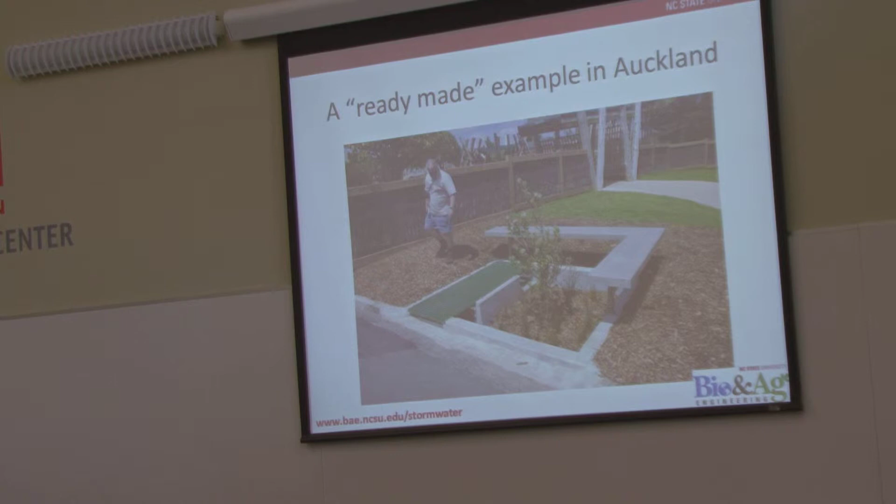Another ready-made example from Auckland, New Zealand. So you can see kind of an inlet here with a little bit of a pre-treatment area to get the trash and sediment out. And then your filtration side there in the bottom of that picture.

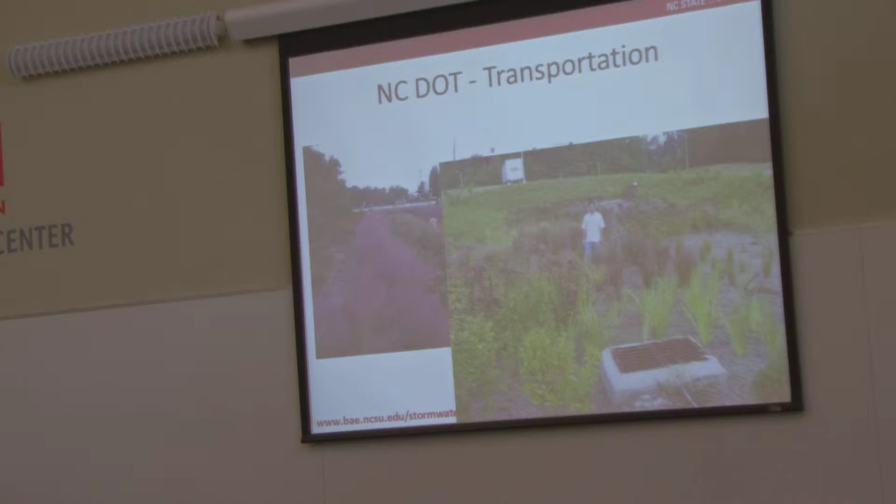NCDOT, our DOT does a really good job with stormwater management. They've got, I think, over 150 bioretention cells installed at this point. So you can see a couple here. They look pretty good, very, very large systems. Typically, our DOT has very large systems that they've installed.

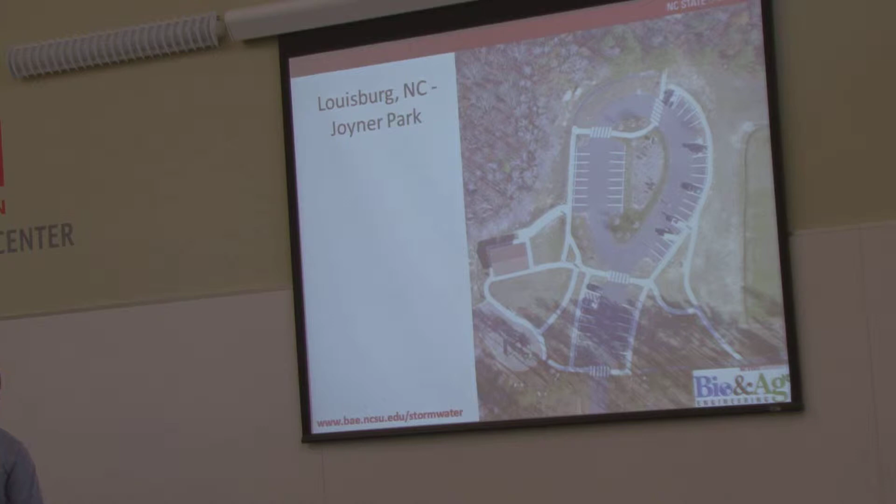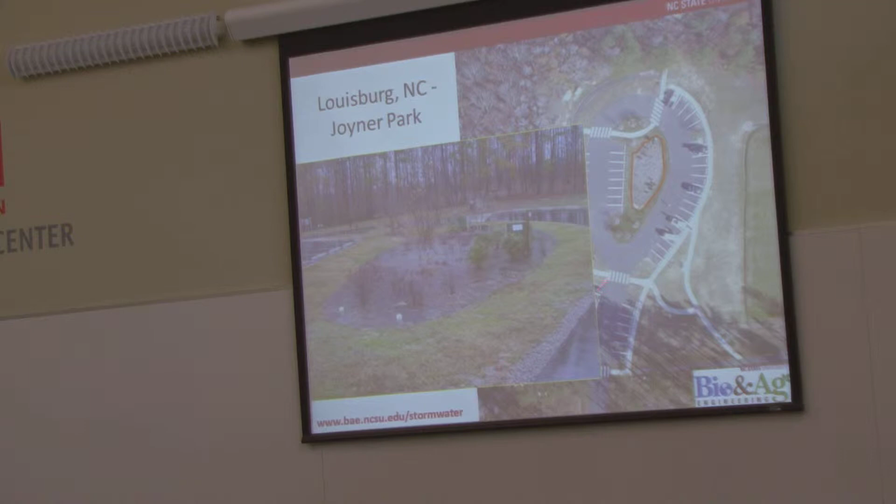Louisburg, North Carolina, this is a research project. I'll show you all some data on this later. This is essentially in a turnaround in a park. You can see the bioretention cell there at full ponding. You can see in this case we're using a filter strip, a grass filter strip with a gravel verge as our pre-treatment for this particular system.

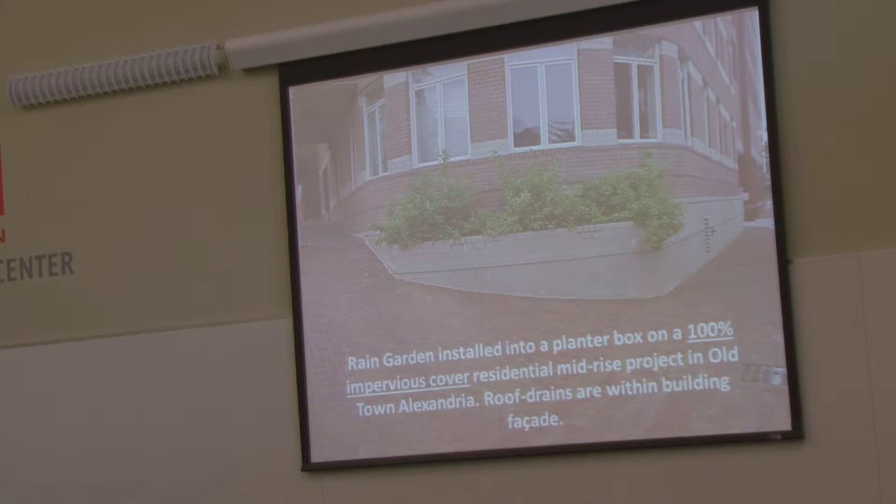That's just taking one downspout. So it's this one downspout right here that's being treated. Another example of ultra-urban application, this is in downtown Alexandria, Virginia, where they've got internal downspouts that are being routed to this bioretention planter here. 100% impervious cover in this particular watershed. And then high dollar landscapes, this is Seattle.

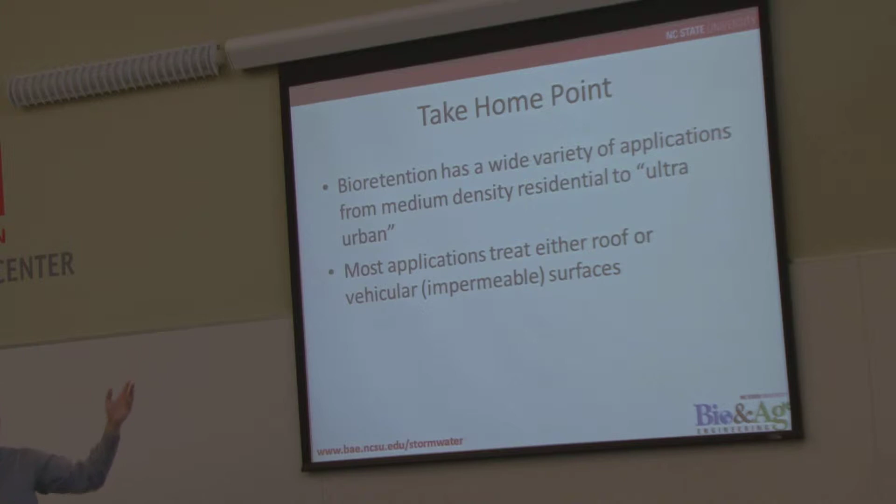So some examples of what you can do and where you can use bioretention cells. You can use them in many different areas: residential, commercial, ultra urban. I hope I've convinced you of that. Most applications are either going to treat roof or parking lots. That's pretty much what you're limited to.

So how do these systems work? Typical schematic here: water comes in from your parking lot or rooftop. That water then fills up the bowl, which may be 9 or 12 inches, or maybe a little bit deeper. You have vegetation on the surface, and water moving through a permeable fill media, which is often sandy.

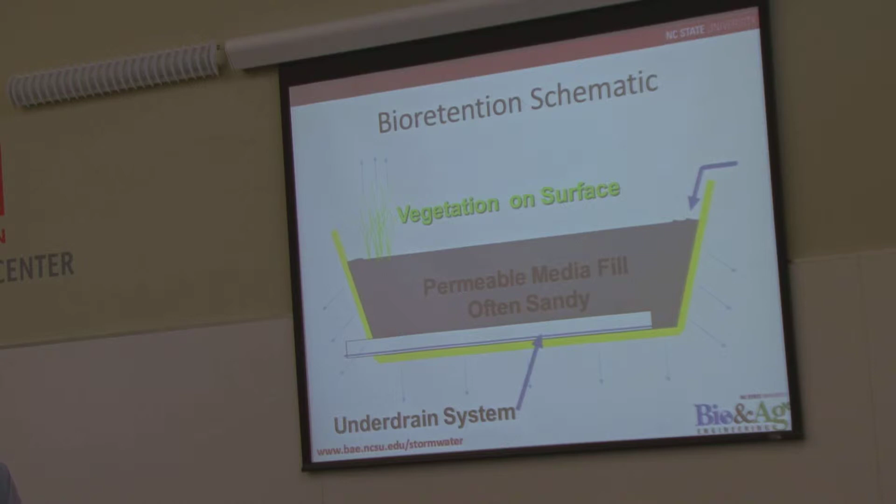And then the water moves down and either out through the sides or the bottom, which we call exfiltration, or drainage out through an underdrain, which is typically installed, as Corey said, unless you have very high infiltration rates in your underlying soils, basically coastal plain type applications.

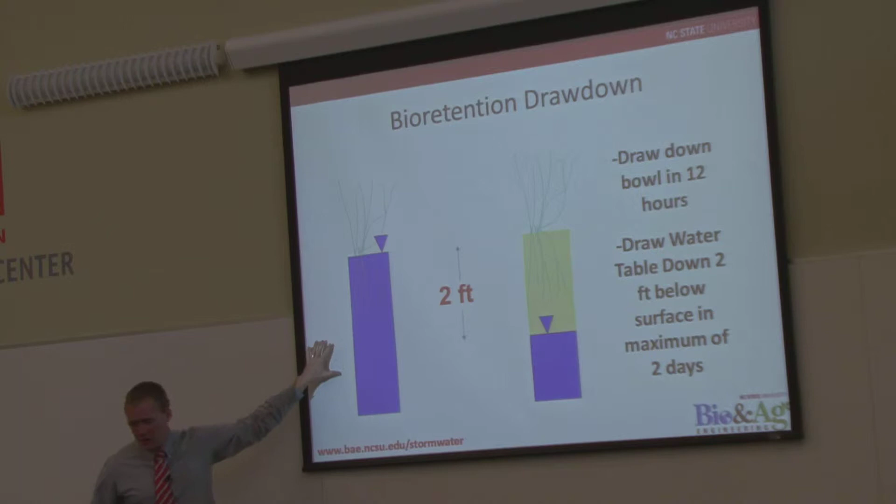Drawdown of bioretention cells: you do need your bioretention cell to draw down, otherwise it will turn into a wetland. If you have extended periods of water, your plants will die off and it won't function as a bioretention cell. Right after the storm event, the water will have filled all of the media as well as the bowl. What we recommend in North Carolina is having an infiltration rate such that the bowl draws down in a 12-hour period, so you should see no water on the surface 12 hours after the end of rainfall.

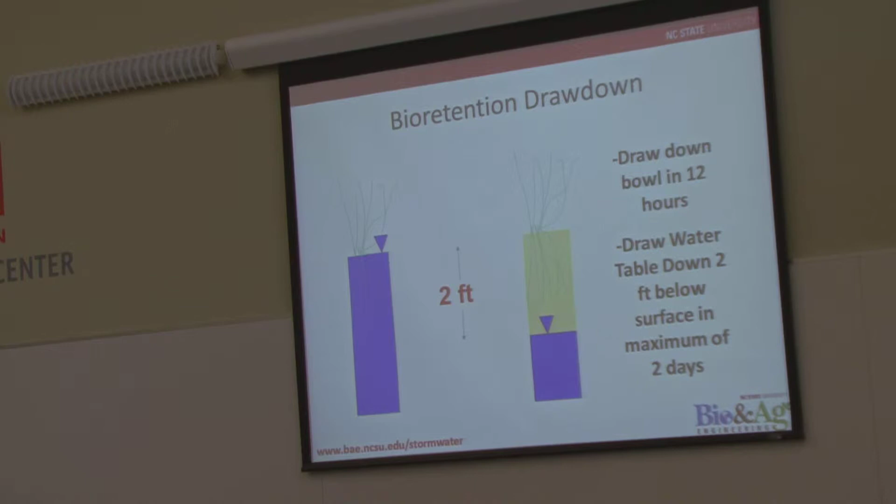And then we want the water table to draw down an additional 2 feet below the bottom of the bowl, so basically 2 feet of media would be drained after 48 hours. That's our requirement in North Carolina. I think that dovetails pretty well with y'all's here, pretty close to what you guys have to meet as well.

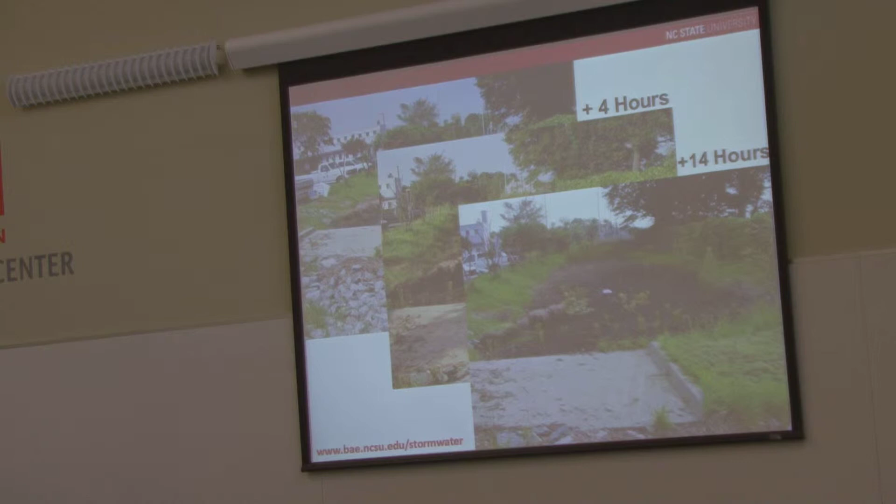Here's an example, back to the Hal Marshall building in Charlotte. Right after the storm event, you can see the bowl is filled up. 4 hours later, we're starting to get some drainage. And then 14 hours later, you can see the mulch is moist, but there's no surface ponding. That's what you want to see: the surface bowl completely drained within 12 hours. That's going to give you the best long-term performance.

Design objectives for bioretention for water quality and water quantity. You can completely control the 1-year storm depending on what you do, and maybe the 2-year storm depending on how you design these systems - I'll talk more about that later. You can obviously partially control the larger storms, but you're not going to get anywhere near complete control of the 10, 25, or 100 year storm.

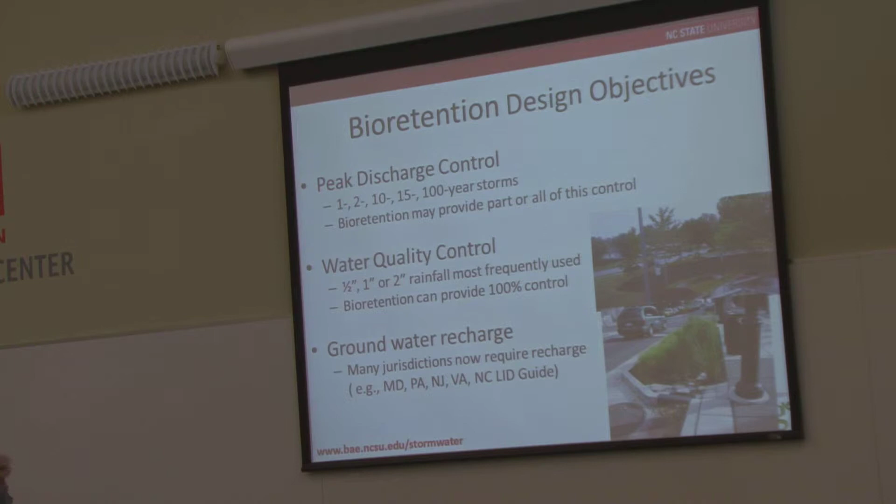Water quality control, we're typically designing in North Carolina for the 1-inch storm in the Piedmont and the mountains. We do have a slightly larger 1.5-inch storm event used for design in the coastal plain, simply because they get more rainfall - roughly 20% more rainfall in Wilmington, our coastal city, than we do in Raleigh. Then there's also various jurisdictions that require groundwater recharge, and these systems will provide you benefits in groundwater recharge, as I'll show you.

Seasonally high water table - is that a problem with bioretention? Yes, it is. We don't want to trade a surface water issue for a groundwater issue. Groundwater is arguably harder to treat than water that you have at the surface. So areas where seasonally high water tables are near the surface, namely coastal areas, floodplains, wetland areas - those are areas you want to avoid.

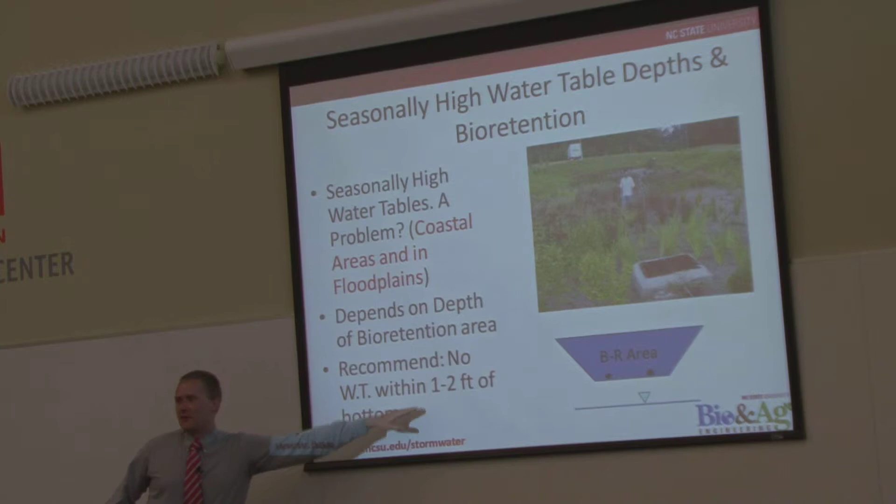What we recommend is no water table within 2 feet. This says 1 to 2 feet, but I know that engineers cheat, so 2 feet of the bottom of your cut. And I think it's 2 feet here as well.

So the reason for that, or what that means, is if you have a 1 foot ponding depth, a 1 foot bowl, and if you have 3 feet of media, and let's say roughly a foot of aggregate in your drainage layer, your water table now has to be 6 or 7 feet below grade. So you really do have to have some depth to your water table to make these systems work, unless you have a shallower media depth than the typical 3 feet.

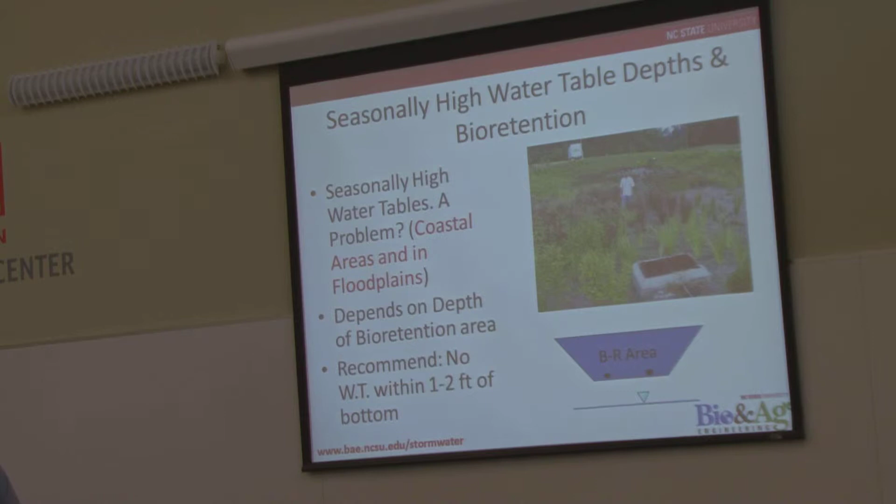The reason for this is just to have some native soil underneath the bioretention area to filter out any additional pollutants that have made it through your media and to the bottom of the cell.

Pollutant removal mechanisms. The reason why bioretention works so well is it's got the most pollutant removal mechanisms out of any green infrastructure BMP that's out there.

Sedimentation: the water's coming in with velocity, so it's picked up particles and trash. You're putting it in a basin, so the velocity is pretty much near zero. Your trash is going to drop out, and a lot of the suspended sediment is going to drop out. Because a lot of phosphorus is attached to sediment, you're going to get at a lot of the phosphorus in the water as well.

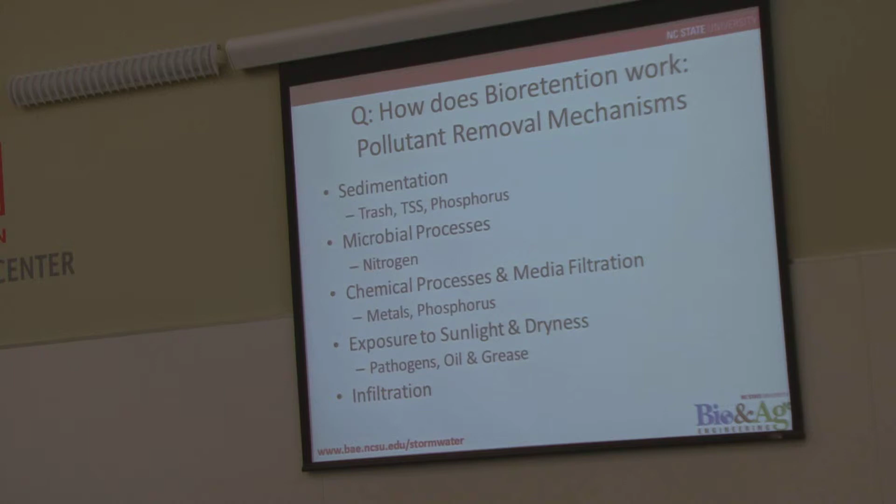Microbial processes, denitrification, which we can force with the internal water storage zone that Corey mentioned earlier, and I'm going to talk about ad nauseum. We can get a lot of denitrification and take our nitrogen to N2 gas, which is 78% of our atmosphere. We're breathing it constantly.

Harmless. Chemical processes and filtration are going to get at our metals and phosphorus. Basically, they're going to adsorb to either organic matter, which is chemically binding to organic matter, or to clay and silt particles.

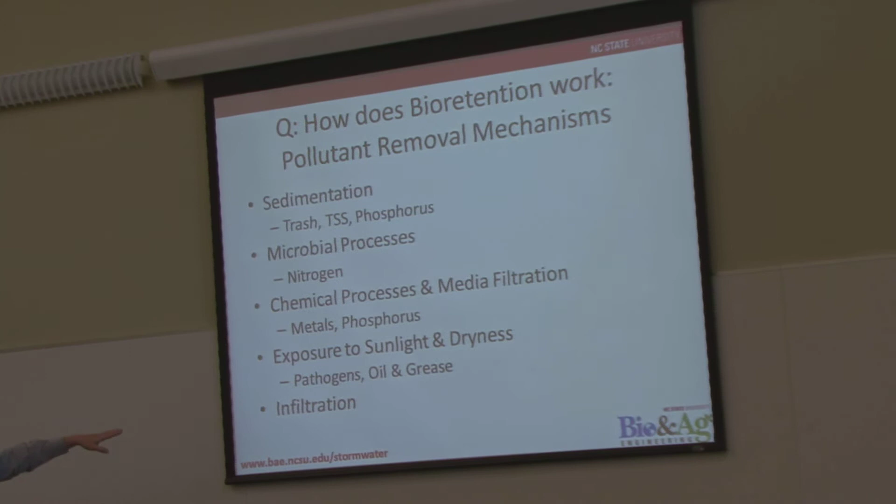And then exposure to sunlight: the reason we want these practices to dry out is to kill off the pathogenic bacteria and to break down the oil and grease that is coming in off of our watershed. And then obviously infiltration is going to take care of part of our pollutant load that's coming to our practice.

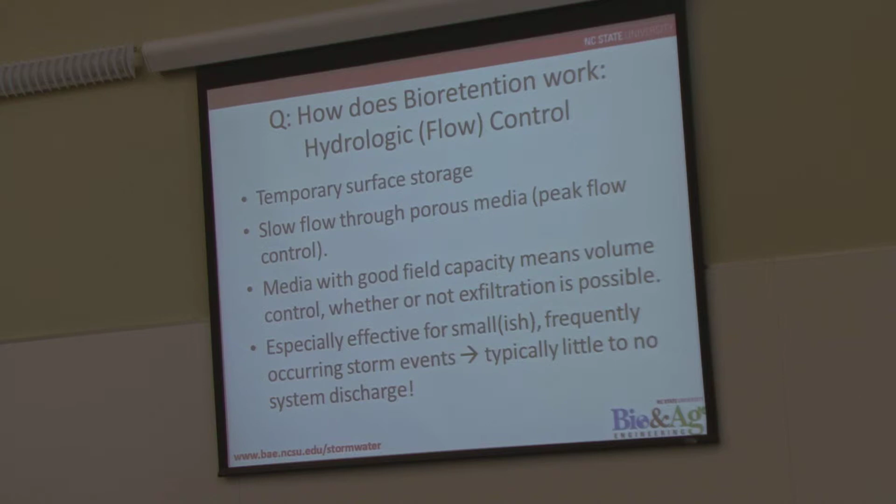Okay, so some common design questions.

Are there any Tennessee alumni in here? Because that guy kind of looks like one, right? I like that, it's the same burnt orange color as Tennessee. Anyway, this is one of our old grad students.

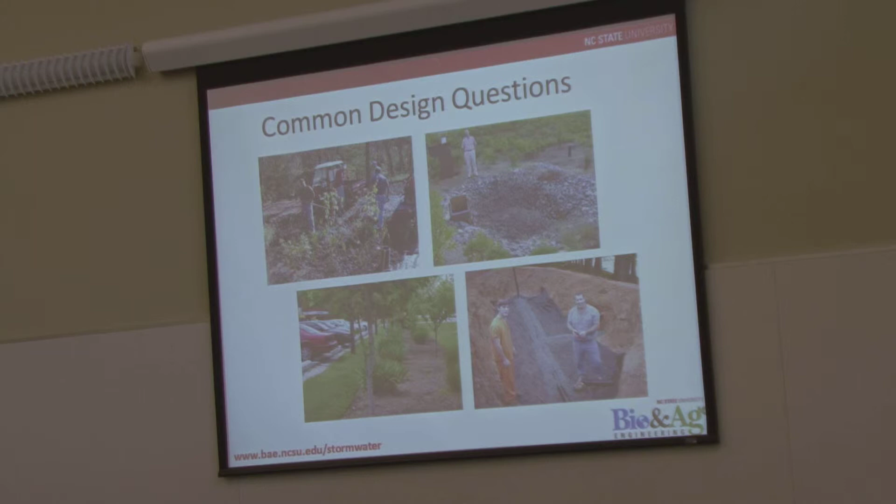Ponding depths. What ponding depth do we want to use for bioretention? This is obviously a big question because the deeper the ponding depth, the smaller the surface area of the practice gets, so the cheaper it is to build, hypothetically.

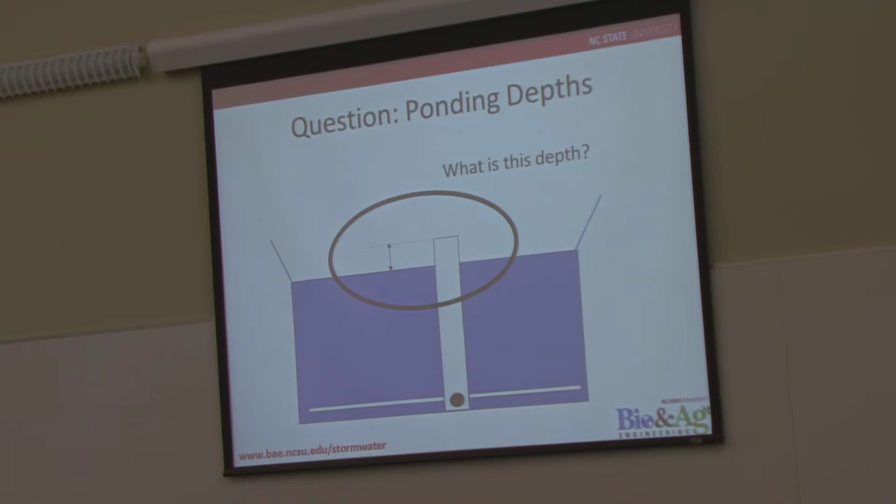So first I'll show you a couple of examples of ponding, question mark, as in I'm not sure it's occurring. There's a lot of this that happens, over mulching, where people get really mulch happy and just dump in mulch, so you don't have any ponding area in that cell.

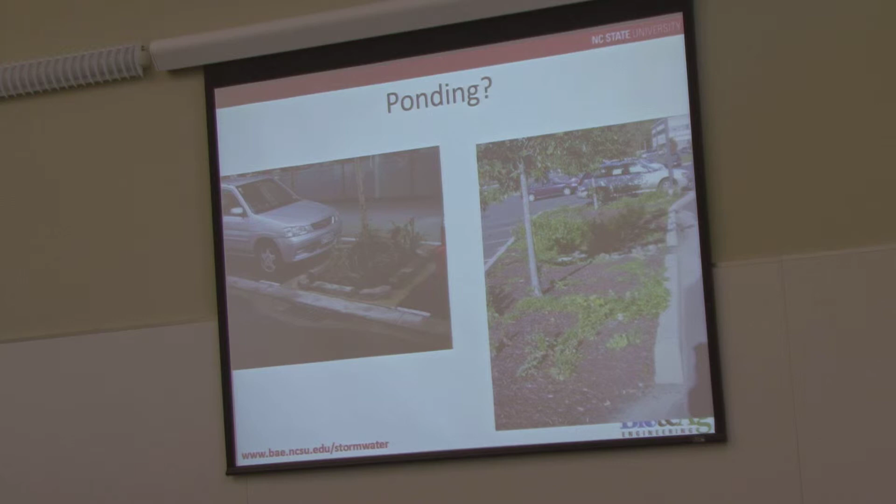There's also a lot of this that occurs, where the contractor thinks he'll do you a favor and puts a grate in so that you get drainage. I would argue there's probably not much ponding in that cell.

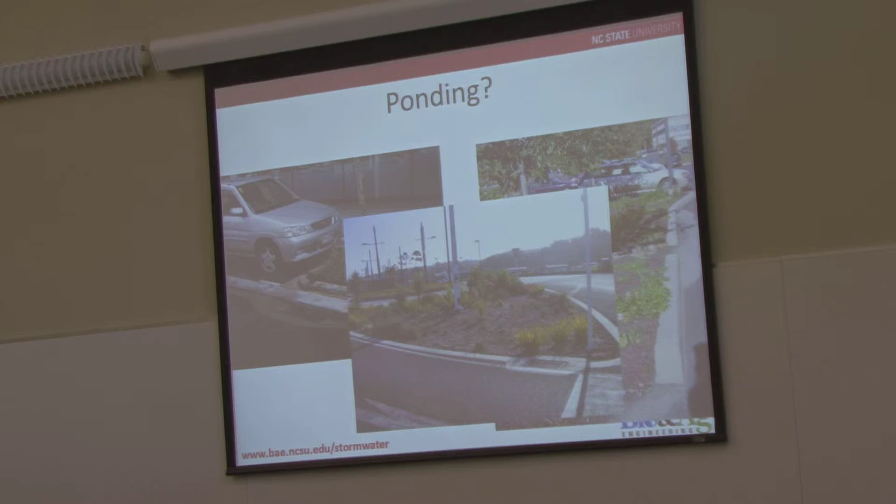And same thing here: the gutter is coming right to the drain, and there's no way for the water to get into the bioretention cell. So that's something on the construction oversight end to watch, because often contractors will, again, think they're doing you a favor and they're really not.

So, maximum ponding depths - again, this is an NCDOT bioretention cell. You can see the overflow structure here. Your ponding depth is going to be set by the invert elevation of this grate, so that's really critical to get that elevation correct, and it should definitely be checked post-construction by whoever is doing the construction oversight.

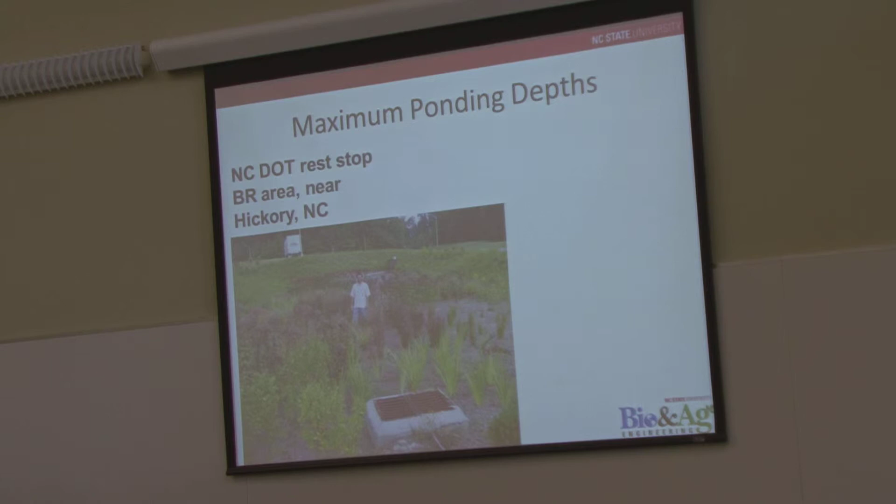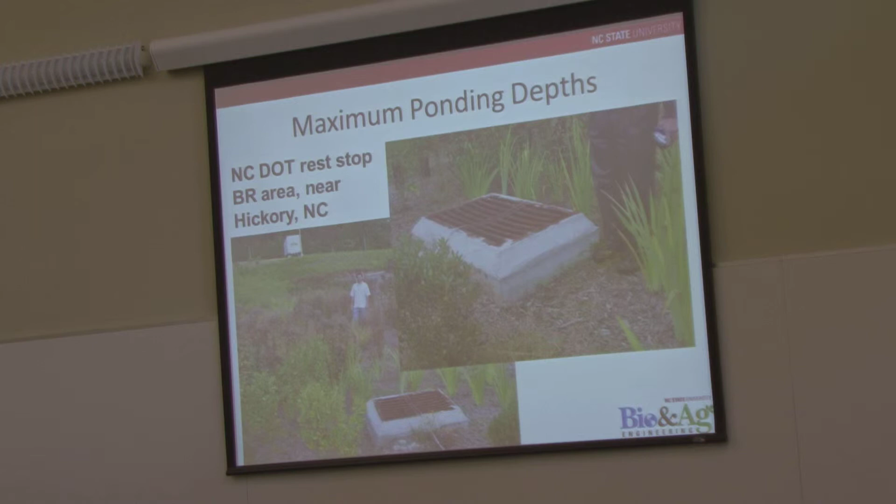I will say there are some jurisdictions in North Carolina that allow an 18-inch ponding depth, and that does appear to work qualitatively, anyway. We don't have any data on it yet, but it does appear to work fairly well.

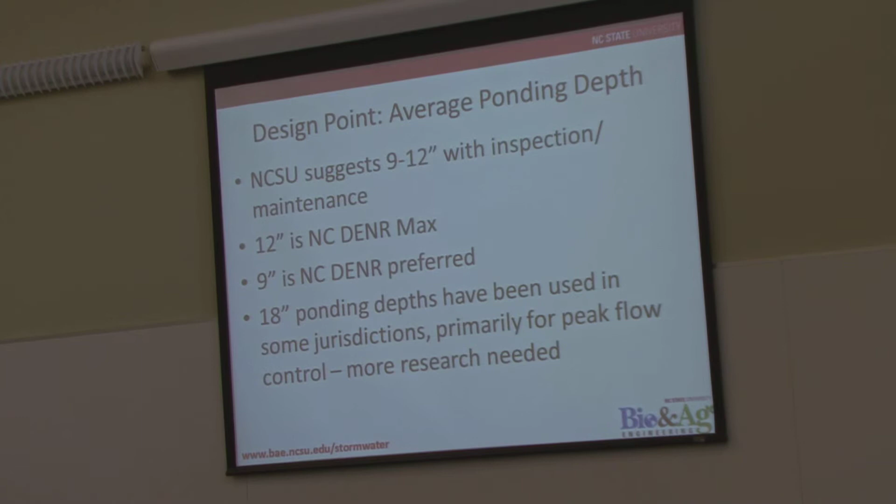What they let you do is they still make you capture the 1-inch water quality volume in the first 12 inches, but then they give you an additional 6 inches of ponding simply for peak flow mitigation. So you basically have an orifice set at 12 inches above the top of the mulch, which gives you an additional 6 inches to mitigate perhaps the 1 or 2 year storm, which you may not be able to get to with only 12 inches of ponding. So that's out there and has been done, and our DOT often pushes the envelope some because they don't have to meet the standard specs that our DENR, Department of Environment and Natural Resources, puts out, so they can play with some design variables.

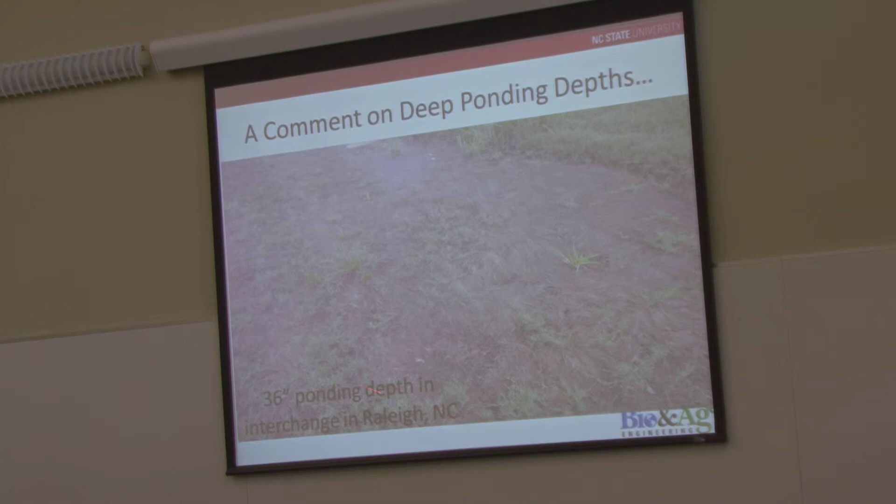This is an example of the bottom of a grassed bioretention cell. This happens to be in an interchange on I-440 in Raleigh, and you can see this has a 3-foot ponding depth on it. So really we're getting now towards a dry basin or wet basin at that point where we've got a lot of ponding. You can see the grass health - what would you say that is? Not very good, right? So we need a bio component to this. It can't just be retention and filtration, otherwise the practice is not going to function as well for water quality treatment. So 36 inches is not something I would recommend - I think that's gone a little too far, in my opinion.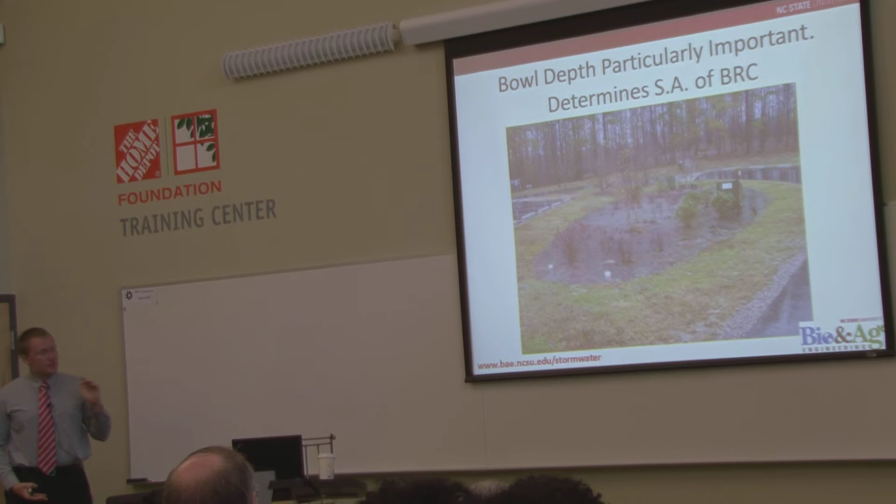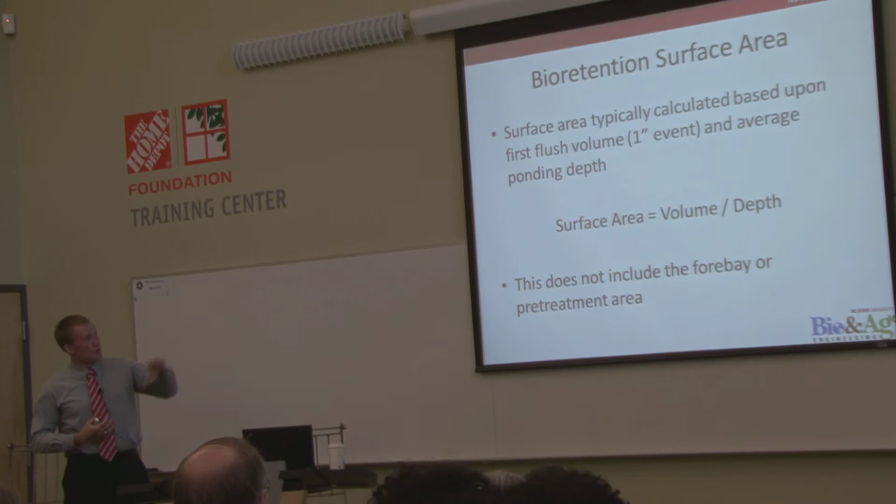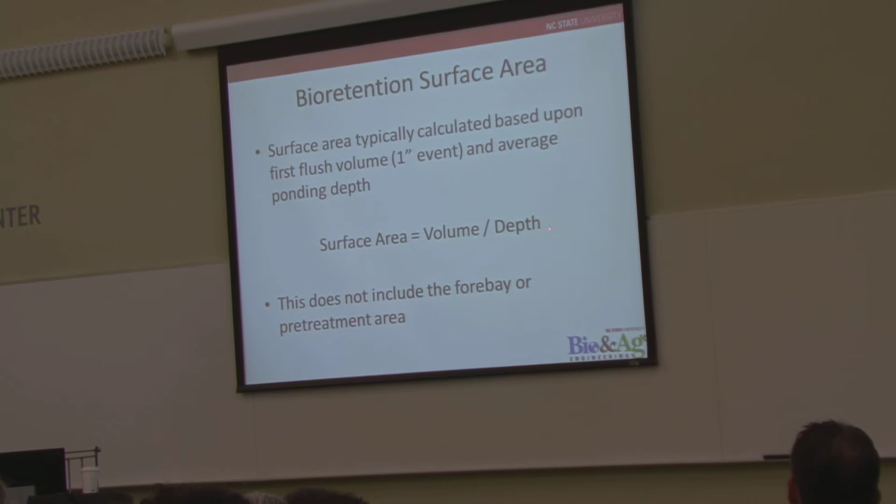This bowl depth is particularly important because, as Corey mentioned in his intro, it does determine the surface area of the bioretention cell, and therefore that's a key component of the cost. So your design calculations are a little different, but ours just gives you credit for the bowl storage. It's literally just a volume of water coming in off the watershed over the ponding depth in order to calculate the surface area - a very simple calculation.

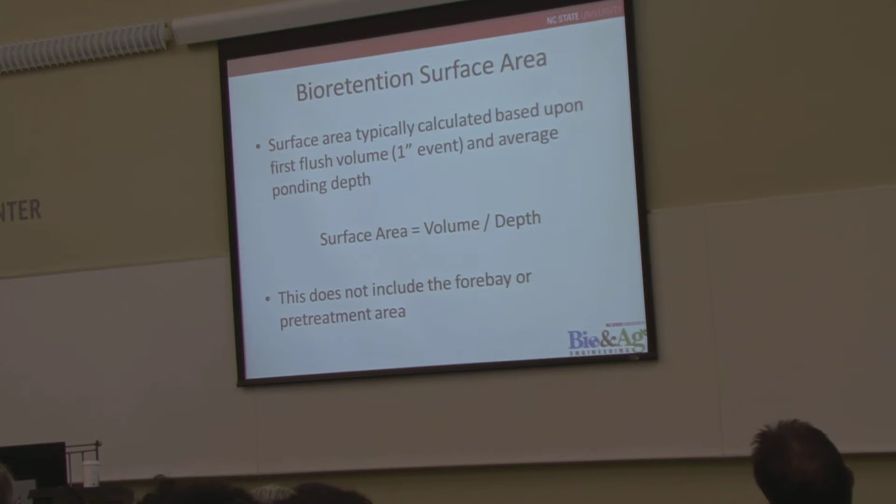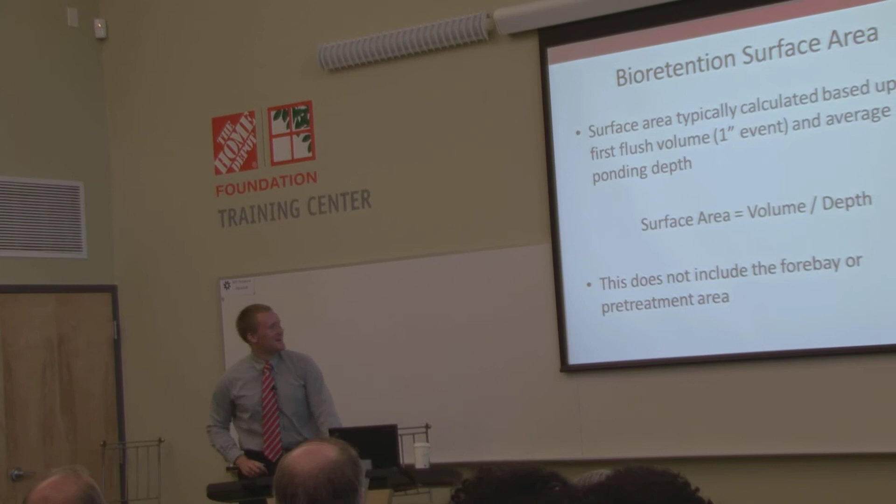This is, of course, conservative because we're not giving any credit for the void storage in the aggregate or in the soil, so we're actually getting more treatment here than what's being credited. However, I'd argue that a lot of these cells have installation issues that occur, so having a bit of conservatism here is not necessarily a bad thing. Our engineers in the state might argue otherwise - I'm looking at one right now, and he's laughing, so I think he'd agree. This surface area doesn't include the pretreatment, and we'll talk about pretreatment in just a little bit.

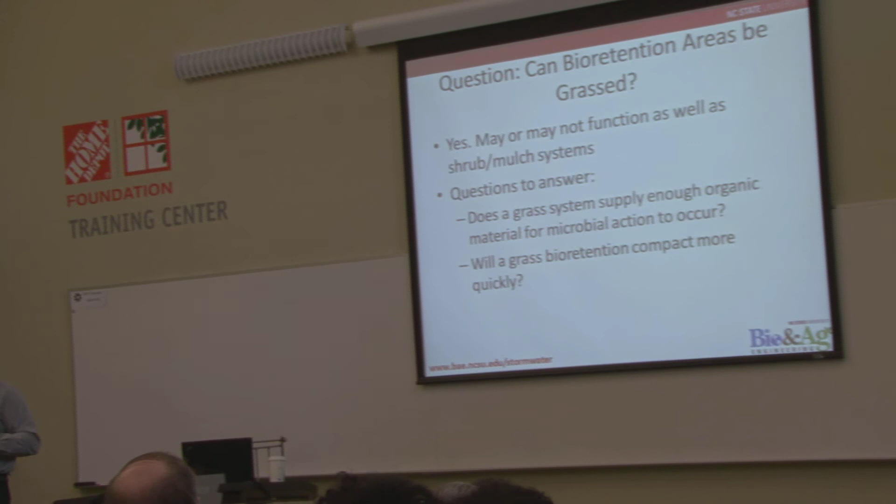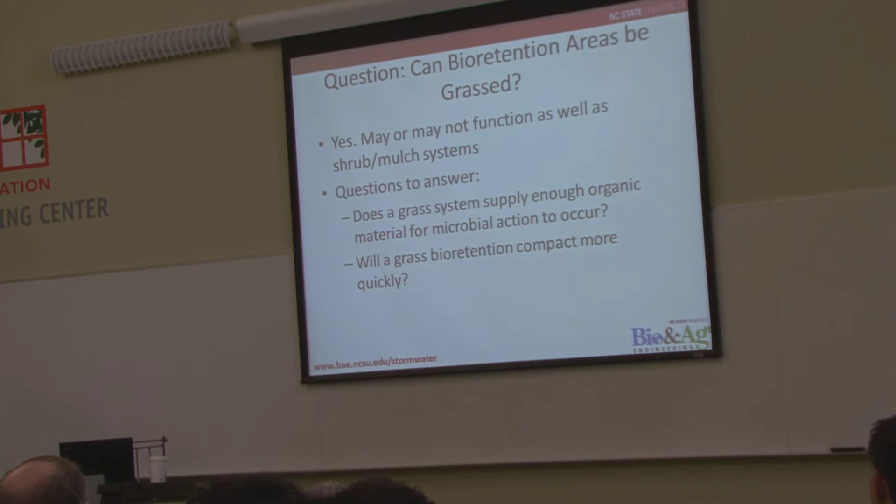One question you'll get - the typical bioretention cell, like what we have outside, is maybe a little more of a bioswale, but what's out back here is a tree, shrub, mulch type system. But one question we got early on in North Carolina is, can these systems be sodded? Can they be grassed? And the answer is yes - we've done research on them, and I'll show you a little data. Some concerns are that with turf grass, your rooting depth is often very shallow, say 3 to 8, 12 inches deep if you're lucky. So over time, will you really have enough organic matter in that soil to do some of the denitrification activities, some of the microbial processes needed for good performance? And the other thing is, because you don't have a deep rooting depth, will these systems compact more quickly, since you don't have roots going 2-3 feet deep into the soil creating macropores for vertical flow?

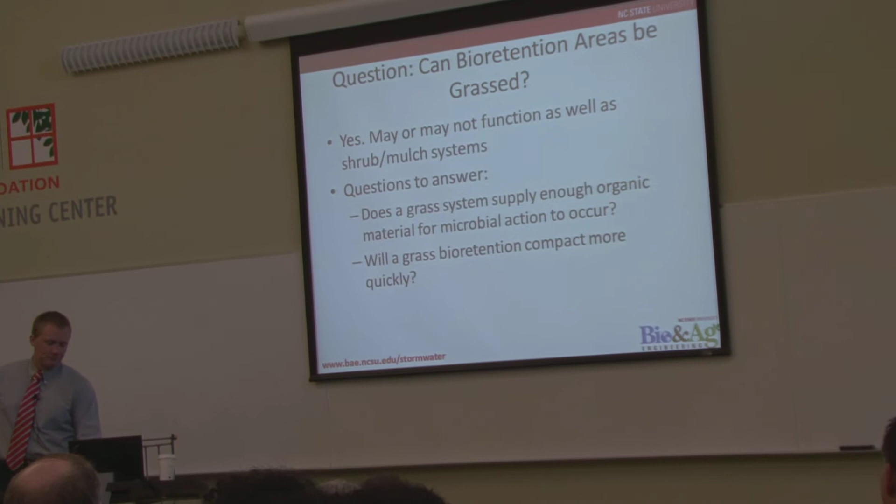So what's your minimum top width on a berm, especially when you're looking at 6 to 12 inches of pond? This one is probably 3 feet wide and it's just a triangle on the outer impoundment. I don't know if there's actually a standard for it, but my gut would be I'd want about 2 feet at a minimum, just flat, and then 3 to 1 side slopes coming down to the ponding.

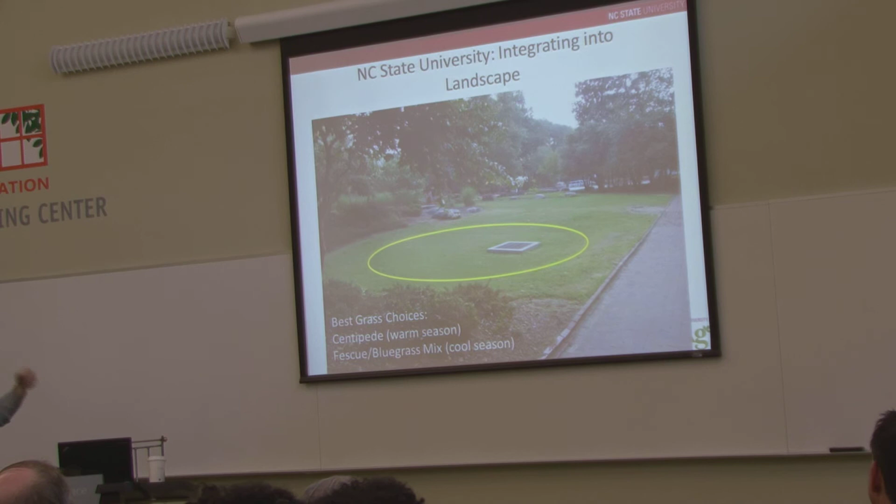Here's an example of one on NC State's campus, pretty near my building where I'm housed. You can see the ponding depth here. It's a simple retrofit of an existing catch basin - they dug out around it, put in specialized media, and called it a grass bioretention cell. What you will get is some of these 'hey y'all, watch this' moments - typically involves a large truck and a few guys who did donuts in this particular grass bioretention cell. They actually did us a favor, though.

One thing you have to be careful with grass bioretention is where your sod is grown, because you have a really nice porous media underneath it. If you grow it on Central Georgia red clay, what happens when you cut sod? You have, let's say, a quarter to half inch of soil that comes off of that sod cutter, and so you've just stuck a really nice clogging layer on top of really expensive media. This guy actually broke up some of the clogging that was occurring because we got this particular sod from the Piedmont of North Carolina, where we have clay soils as well.

So what I'd recommend is if you're going to put in grass bioretention, get your sod from the coastal plain, or spec washed sod, which is something the golf course industry uses specifically for greens. It typically has next to no soil on the sod, so it's like bare root sod pretty much, and you can get that commercially available. It is more expensive, but it will prevent clogging at the surface.

How much fill media is needed is another big question, because you're going to spend $25 to $30 a yard in North Carolina on bioretention media, so it is very costly. The shallower you can make your media, the cheaper your cell will be. So basically, what determines that media depth?

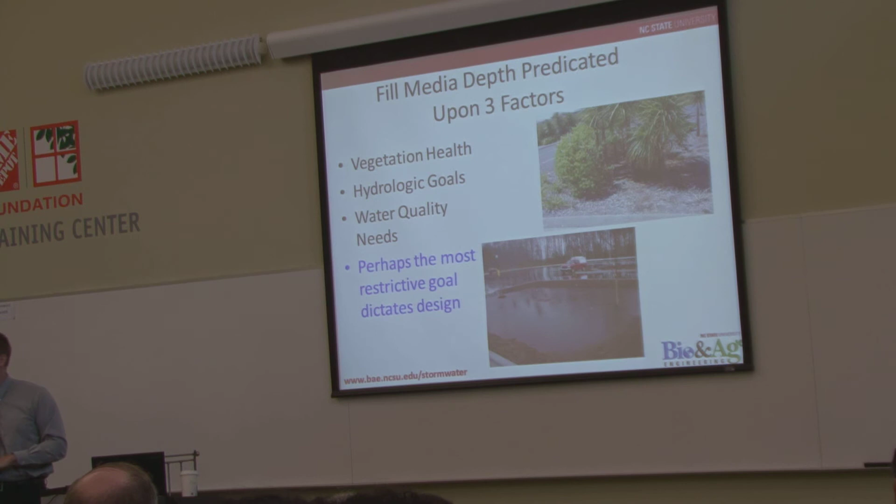It's predicated upon three factors: vegetation health - you have to be able to grow something in it; the hydrologic goals - how much water do you want to store and infiltrate; and then your water quality needs - what pollutants of concern do you have in your particular watershed.

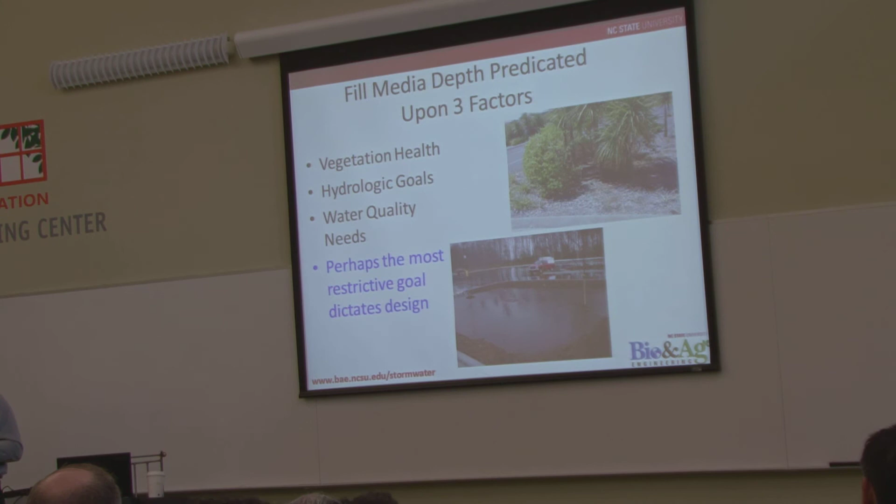For soil depth, the minimum recommendations we have: typically with turf grass, you can get away with a 2-foot depth - that's actually probably more than you need. With shrubs and trees, we say a 3-foot minimum media depth is required, with 3.5 to 4 feet being optimum, but you never really see these going in because they're more costly, of course.

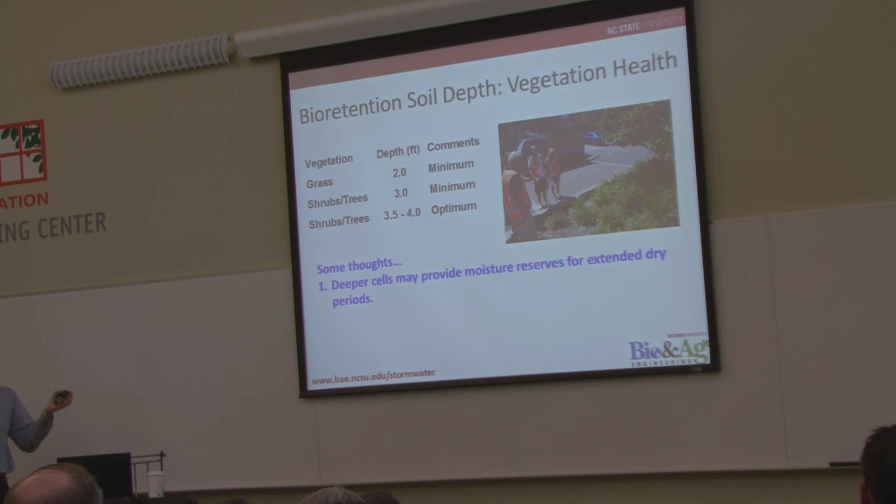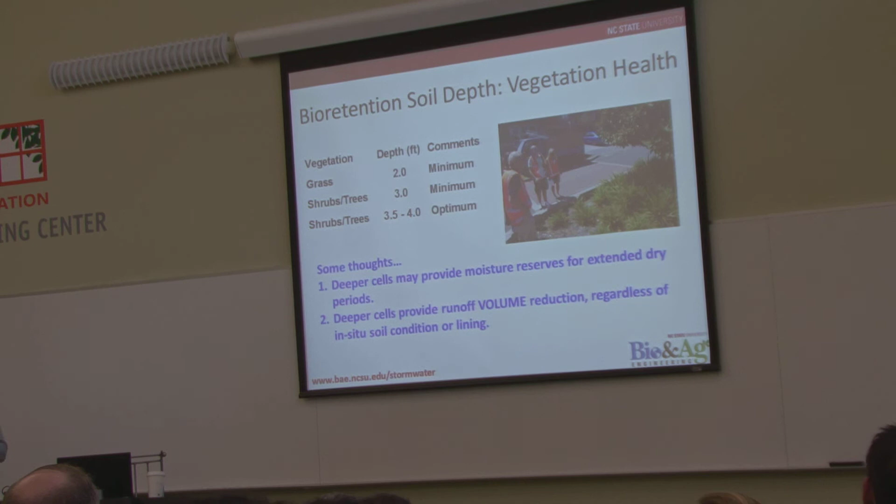Some thoughts: deeper cells do provide more moisture reserves for trees and shrubs, and they can tap into those during droughts or extended dry periods. And obviously deeper cells provide more runoff volume reduction because you have more porosity in that soil media than you typically do in the underlying soil.